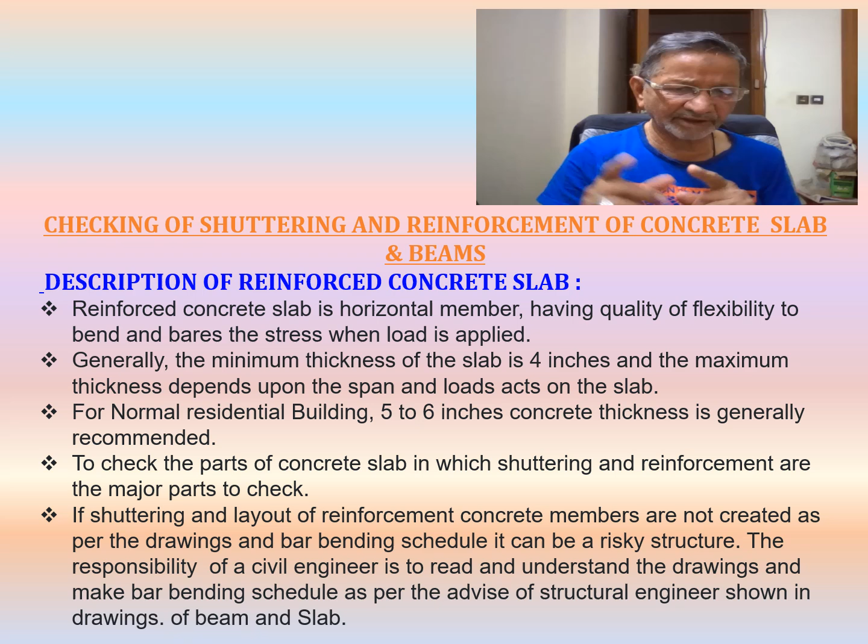So this is very important to check each and every aspect of the part of reinforcement and the part of the shuttering. So we have to go through slides one by one, and we will check the reinforcement and shuttering in different parts and different slides. Thank you.

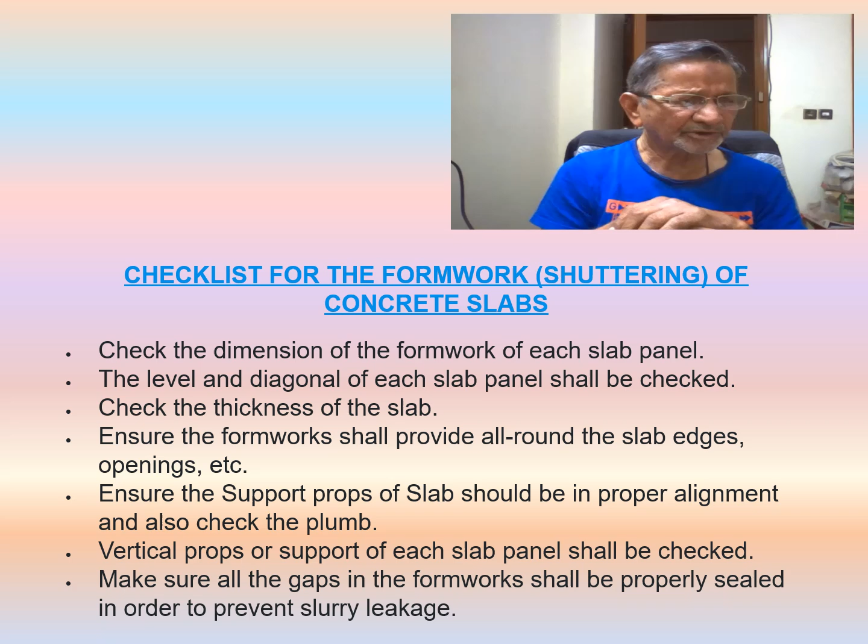Dear viewers, now we will go through the checklist of the slab formwork, means the shuttering. We have to check the shuttering in all the aspects. So I will go through, you can see the slide. In that slide, description of the checking is different from what my video and voice recording is there. So in this video recording, I will just go through briefly the checklist of checking the shuttering and formwork of an RCC slab and beams.

Number one is that you have to check the alignment and levels. Is the formwork aligned and leveled properly? Number two is stability of shuttering supports. Is the formwork rigid and well braced, means the bracing is done properly, and stable to bear the load of shuttering and the concrete?

Number three is tightness of joints of shuttering. If the steel shuttering is used, all the joints must be tightened and are to be protected from opening. Also, the joints of the shuttering on top are to be without the gaps. If the gap is there, then the cement slurry can leak and the concrete becomes less strength.

Application of concrete releasing agent or the mold oils, because this is also a very important issue: while you are removing the shuttering, it should come off easily if the mold oil or releasing agent is used.

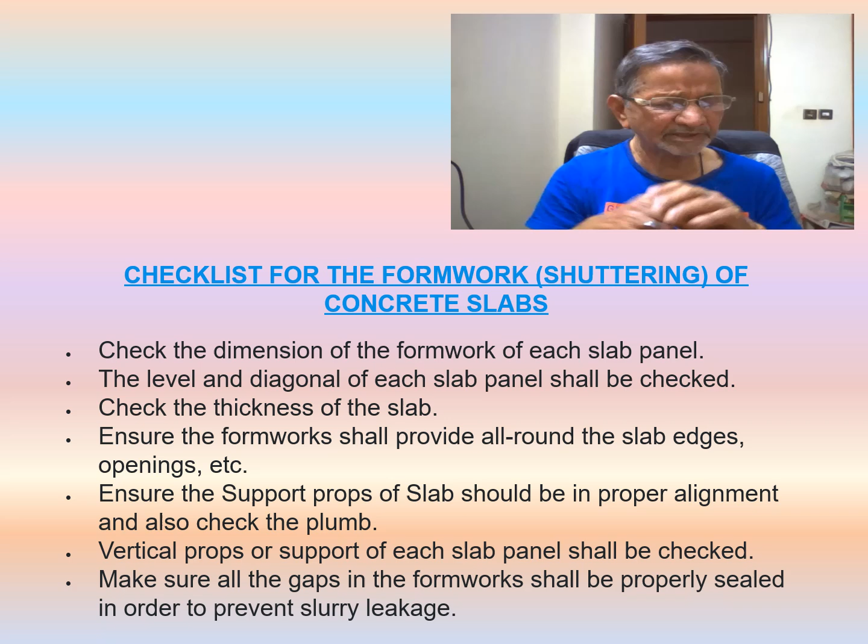Provision of opening ducts at the roof. All the ducts, service ducts, skylights and all ducts are to be marked and placed properly, so that while you are opening the shuttering, these ducts are visible and in their place.

Dear viewers, in slide number 4, we discussed the checklist of the shuttering and formwork of the slab and beams. In this slide number 5, we will go through the checklist of reinforcement of the concrete.

First of all, the diameter of steel. It is very important to check that the reinforcement done for the longer and shorter spans is as per the diameter of the bars in the drawings and specifications, and as per the instructions of the structural engineer. The second point is the correct spacing and covers: ensure the reinforcement bars are properly spaced and adequate cover is maintained.

Overlapping is also one of the important issues. When we are going to do the overlapping, verify that the overlapping is as per the bar bending schedule, drawings, and as per the design and specification. This overlapping is for the future extension also. Proper tying and stability: is all the reinforcement tied with binding wires in a double knotting system and supported well?

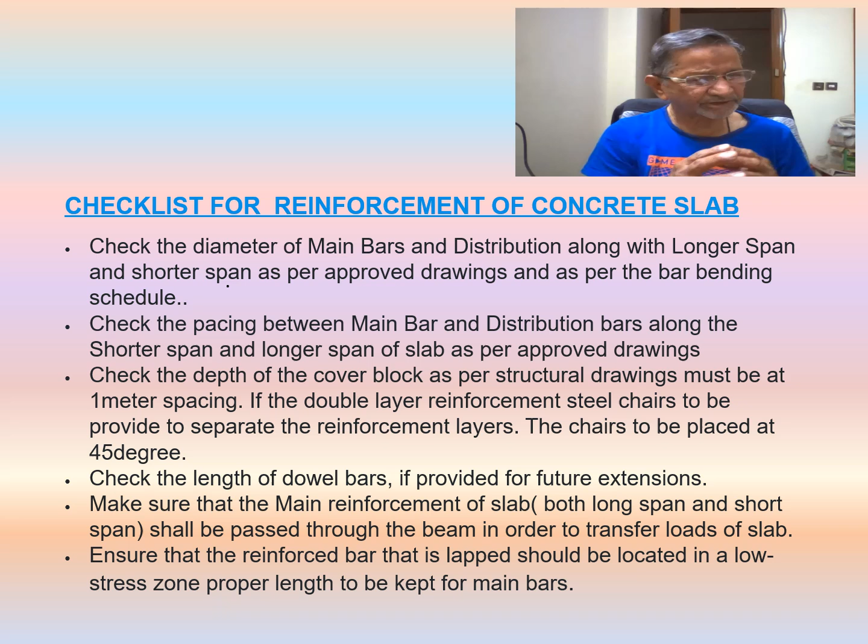Steel chairs are also very important to be provided. Are the steel chairs provided for the double layer of the reinforcement? These steel chairs are to be provided diagonally, not horizontally. Dowel bars are of the correct length for the future extension.

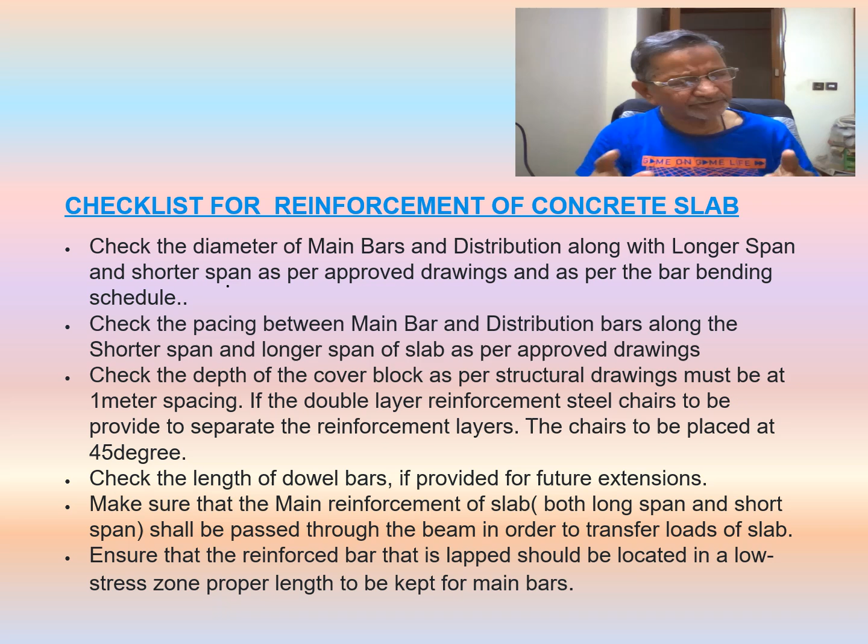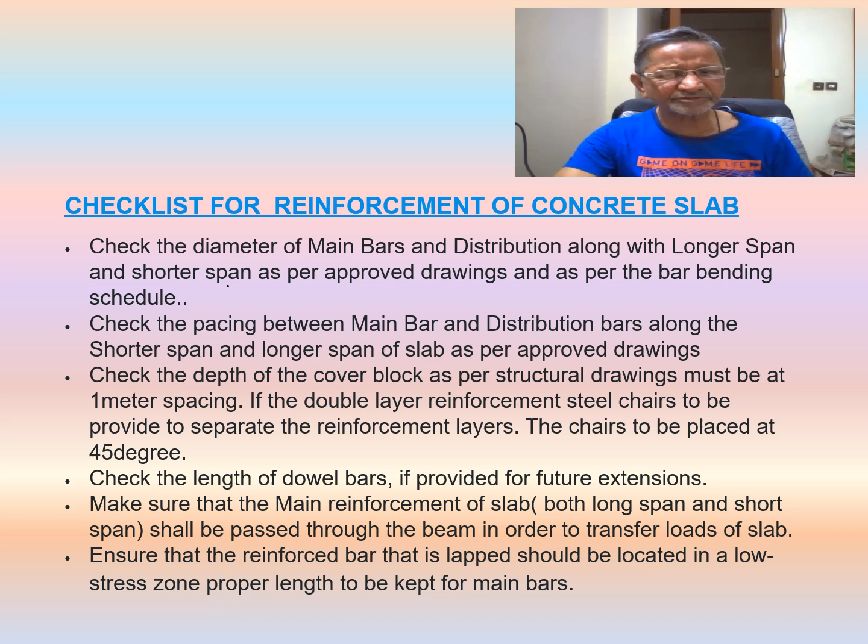One important issue which I wanted to discuss in the beginning is that the reinforcement should not be rusty, because if rusty reinforcement is there, it will wear out after some time, and the concrete will be damaged also. So all these cares are to be taken when checking the reinforcement of the concrete slab.

Dear engineers and architects, we have been going through the slides in which we checked the reinforcement and shuttering for the slab. Now we are in slide number 6, where we have to study the checklist for the beams formwork. Number 1: check the horizontal alignment, because horizontal alignment must be very true to the drawing. Only on the top slab, we have to make a camber so that the slope is maintained at the roof.

Level the width of the bottom of the beams. This is very important. Number 2: properly check the vertical alignment and the plumb. Line and levels of the sides of the beam formwork should be truly done. Check the length of the beam formwork as approved by the structural and architectural drawings. Ensure the depth and width of the beams are as per the approved architectural and structural drawings.

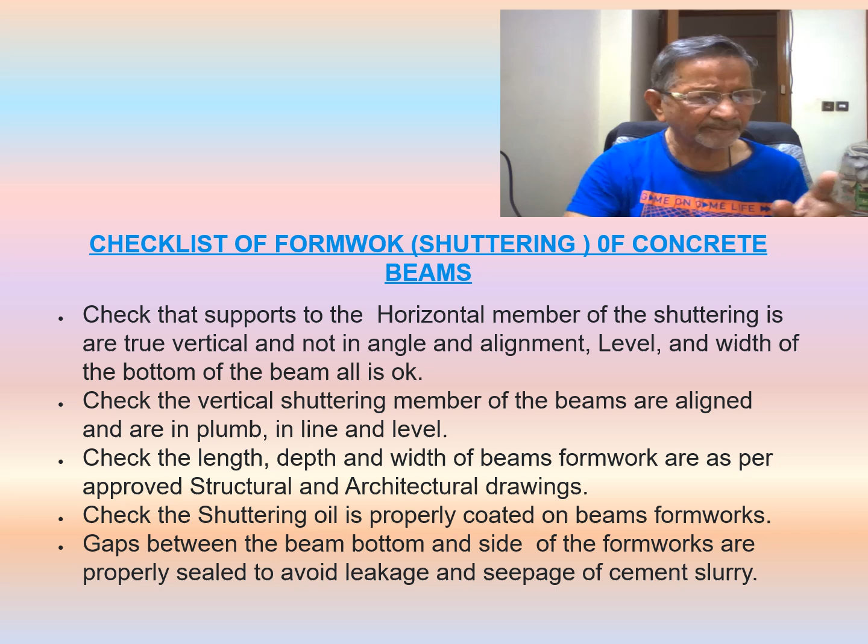Check that the shuttering oil is properly coated on the beams formwork. Is it done or not? If it is not done, then it is mandatory to apply the shuttering oil. Gaps between the beam bottom and side formwork should be checked and closed with tape or by any means. Make sure all the gaps in the formwork are properly sealed in order to prevent the slurry from leaking or seeping through these gaps.

Dear engineers, we have checked the reinforcement and shuttering of the slab, and we have checked the formwork of the beams.

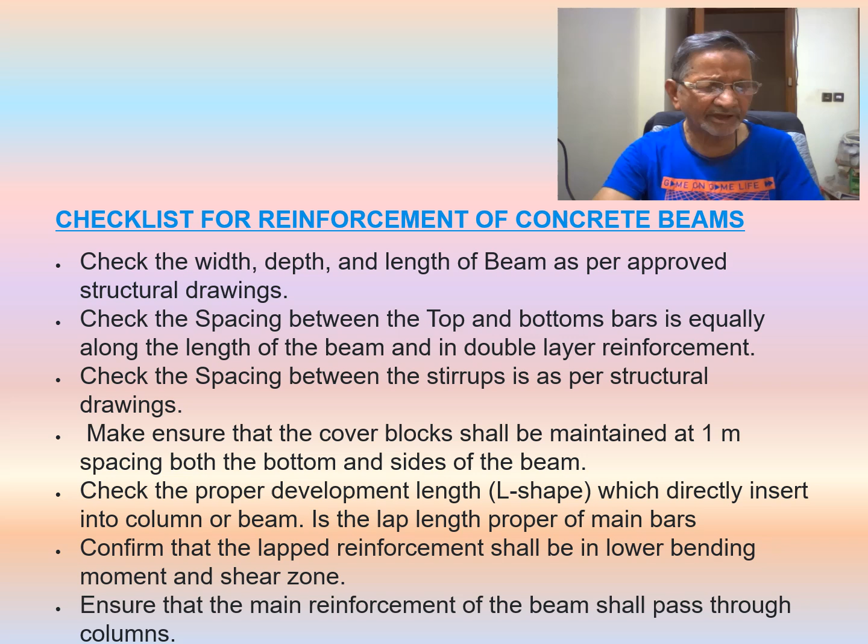Now we are at slide number 7, where we have to check the reinforcement of the beams. Number 1, you have to check whether the depth and length of the beams are as per the approved structural drawings. The diameter of the top and bottom reinforcement shall be ensured. Check the spacing between the top bars and also between the bottom bars is maintained equally along the length of the beams.

You have to check whether the beam has top extra and bottom extra bars, whether these bars are provided or not. Ensure that the diameter of the top and bottom extra bars reinforcement is correct. Check the spacing between the stirrups. Stirrups are very important, and their spacing from one stirrup to the other must be as per the drawing.

Proper cover blocks provided for the bottoms and sides of the beams are to be checked, because if there are no cover blocks, the reinforcement will touch the shuttering, and when you remove the shuttering, the reinforcement will be exposed. Make sure that the cover blocks are maintained 1 meter apart from each other.

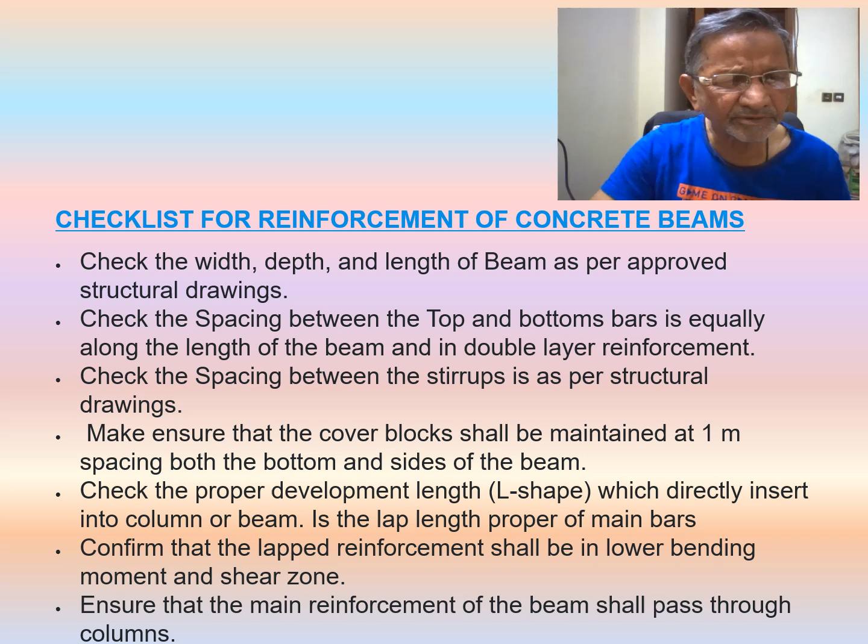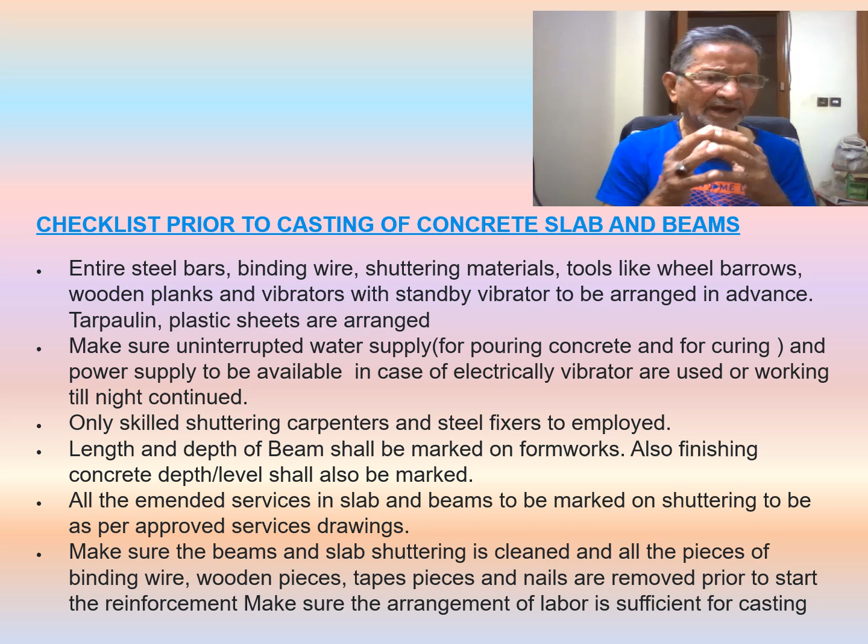Engineers, the architects, the contractors, and all the stakeholders related to the pouring of the concrete for the slabs and beams. So in this way, we have to discuss the checklist prior to the casting of slab and beams, what tools, what material, what manpower is required for the pouring of the concrete. You have to see that the entire steel bars, the binding wires, shuttering material, loose tools, and all the equipment like the vibrators, trolleys and planks are available at site before pouring the concrete.

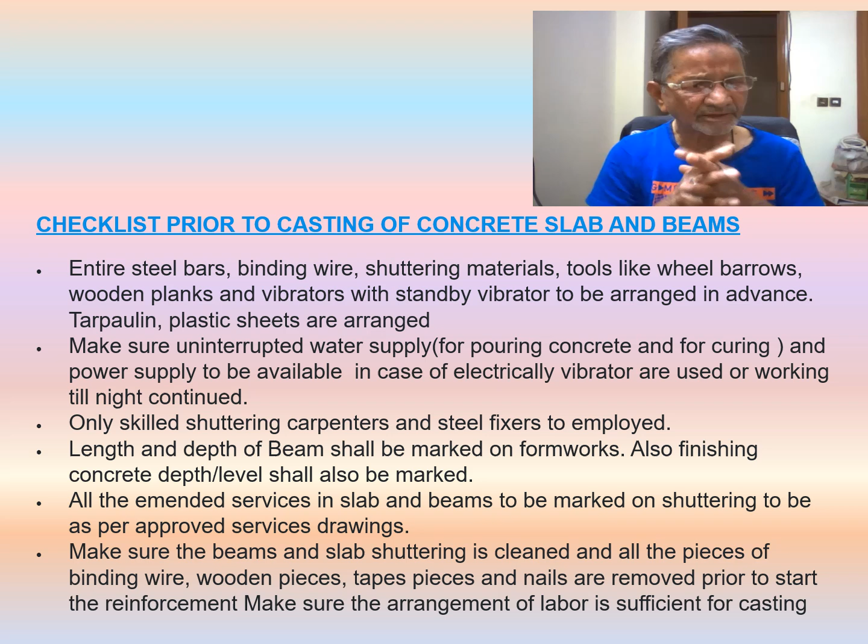All the material procurement is to be planned before making the schedule of the concrete date. For the curing, water is to be arranged. The electrical power supply must be ensured so that there is no interruption during the pouring of the concrete if you are going to use the electrical vibrator, or if power is required to work at night. So care is to be taken for all these things.

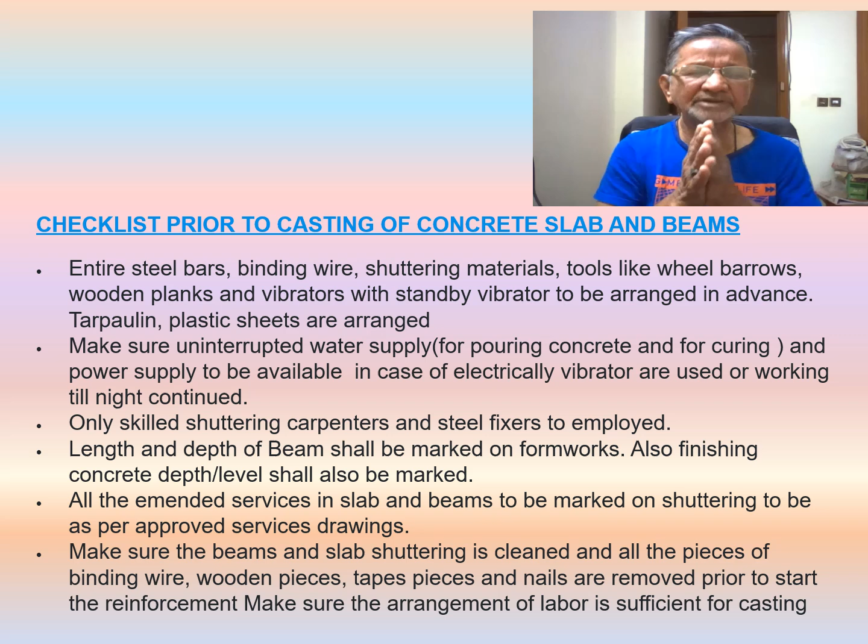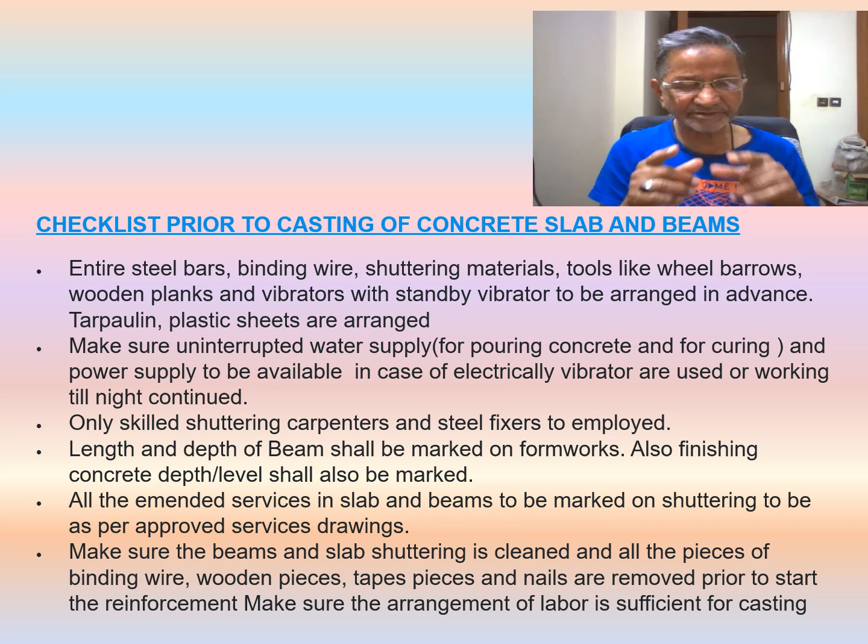The formwork and the reinforcement of the slab and beams are to be properly checked, and all the approvals are to be taken from the consulting engineers and got signed. So this is very important.